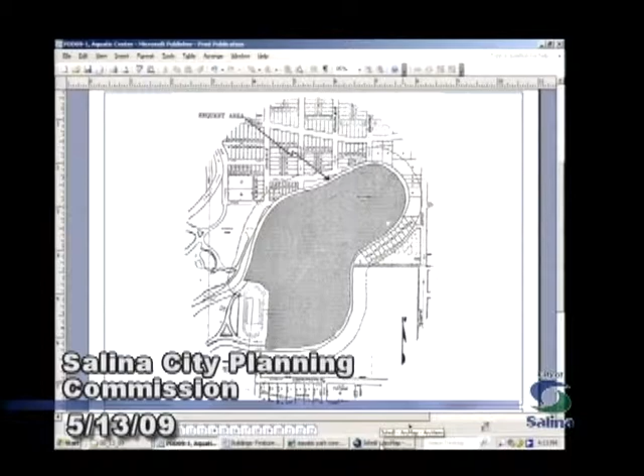This is coming back to you primarily because we first looked at the intensity of the use, the traffic and activity, and determined that this would be a conditional use in the R1 district. But looking at a number of aspects, it was really such a unique facility with unique features that the planned development district, which allows a customized zoning district to be created based on a plan for a piece of property, seemed the most appropriate mechanism.

So Mr. Snyder, Director of Parks and Recreation, filed this application to change the zoning classification of the property from R1 to Planned Development District, and a public hearing was scheduled for this date and time.

As we mentioned, the one thing about a Planned Development District is that you can customize that district according to the plan presented. In the plan presented, there were a number of items we identified, one of which dealt with setbacks of two inner tube storage structures. John, if you want to go to the site plan, you can identify those.

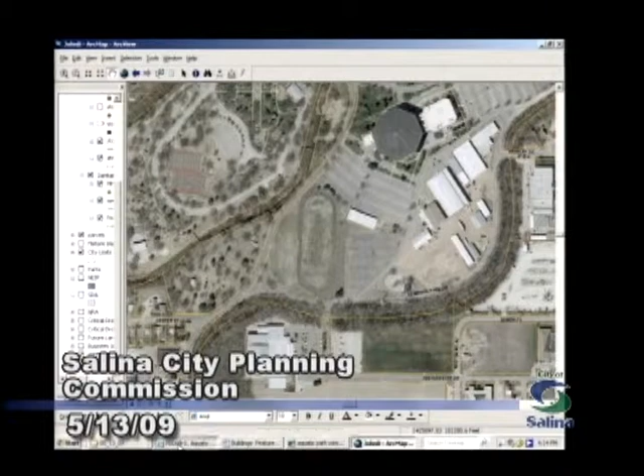Dustin can point those out to you, but we have two inner tube structures along the west side, and then the elevated tubes for the water slides. Those two items are located closer than 25 feet to the west, or Kenwood Park property line.

It's not easy to see clearly from the plans because they're reduced to small scale, but the tower platform for the water slides would be 48 feet tall, and that doesn't fit neatly within the R1 classification.

The other aspect that deals with this is looking at a shared parking arrangement for the Bi-Center, Aquatic Center, and County Fairgrounds that we'll look into a little more deeply.

And then a fourth item: there are existing utilities that serve the Bi-Center, the YMCA, and also an intake line that runs from the Smoky Hill River Channel next to Bill Burke Park and through this parcel to get over to the water plant. All of those items had to be worked around for this particular layout, and we do have some areas where portions of structures would be located over the top of what would be future sanitary sewer and storm sewer easements.

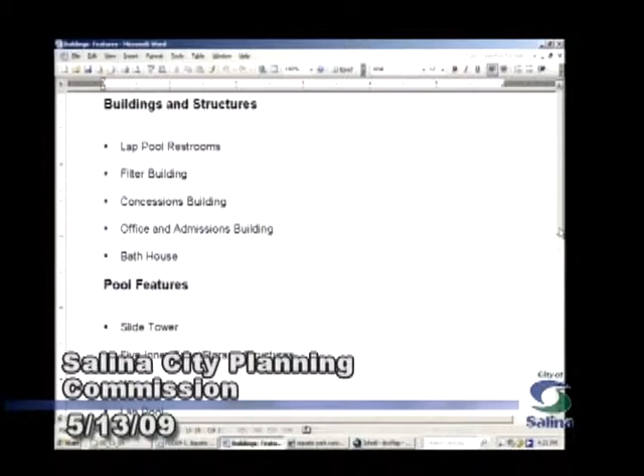We separated this into buildings and structures and then the other features that the pool will provide. I guess, John, it might be best if we just go to a site plan, then I can point it out, because I've got a list that I can read off of.

The lap pool has separate restroom facilities. That way, if a swimming event were taking place during the same time that the pool expected to be open with other people enjoying the park, they could separate, or there'd be a gated system that would separate the lap pool from the rest of the park so that event could take place without disturbance to the other patrons.

There's a filter building in this area that is designed for the functioning of the pool and the filtering system. There's a concession building with a pergola-type shaded structure for the concession area. There's a larger entrance area that will be for offices and lifeguard rooms, and a large bathhouse over on the southeast end of the facility.

The amenities that the park has currently include a large slide tower with 4 main slides that will go to a plunge pool, and another swirl bowl slide that will have its own plunge pool. There's a smaller slide called a family slide that allows multiple people to go down at the same time into a smaller plunge pool.

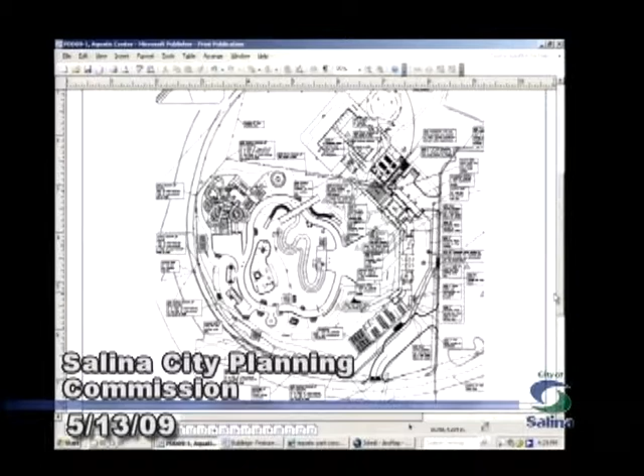As far as signage, I think you have a picture of that, John, and you should have one in your site plan as well. Or do we? Yeah, we've got one in here. You should have one in your packets. I don't see one in our slide package here. Slide 19? Oh, I guess it's slide 19, John.

So this sign would be located towards the southeast corner, and it's approximately 58 square feet in total area, about 9 feet tall, 6.5 feet wide, which is larger than you'd have in a standard residential setting, but this isn't really a residential setting. To the best of our knowledge, no wall signs are being proposed, but under even R1 zoning, they could put up to 2 wall signs on the outside wall of the facility if they wanted to identify something.

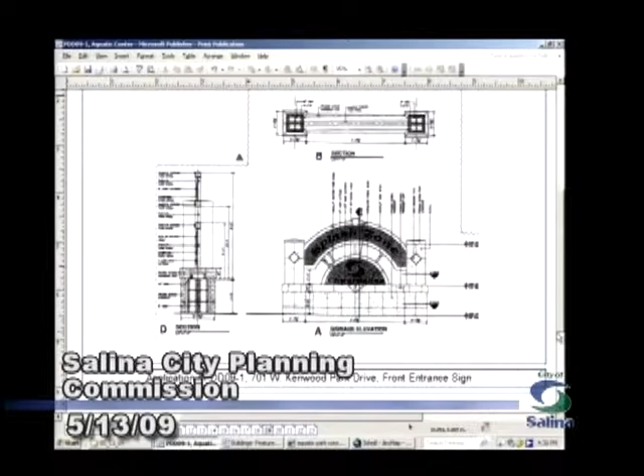As far as landscaping, item 10 there, John, is the overall landscape plan. Our determination is that, applying our width and depth standards to this site, they'd need a little over 16,000 square feet of landscaping and 33 tree units, and they far exceed that minimum requirement.

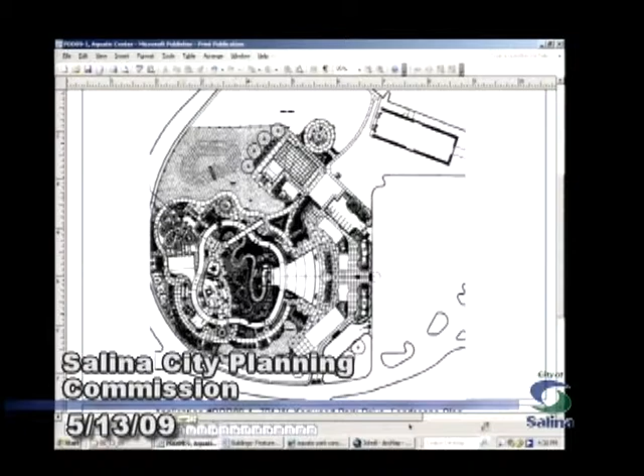They've got shade trees, ornamental trees, evergreen trees, large and small shrubs, ornamental grasses, and wildflowers. So it's a very diverse landscape plan, both on the perimeter and inside the park. The plantings have been reviewed by planning staff and the city forester, and they're all from our recommended tree list and our xeriscaping plant list.

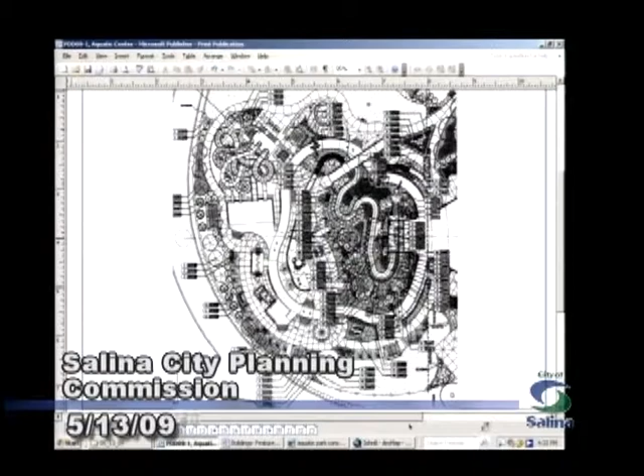As far as parking, just a couple added notes. They have a proposed addendum where they would go in and resurface and restripe the parking area to the east of the site. We also wanted to note that you've got 5 handicapped accessible spaces here, but based on the occupant load and demand for this facility, they're probably going to need additional handicapped accessible spaces close to the main entrance, which will be part of the resurfacing and restriping.

We also wanted to note, John, we have the blow-up there, which is number 20. In this area, they have not provided quite enough width for this driving aisle and backing space, so they're going to need to adjust that to provide a minimum of 24 feet there.

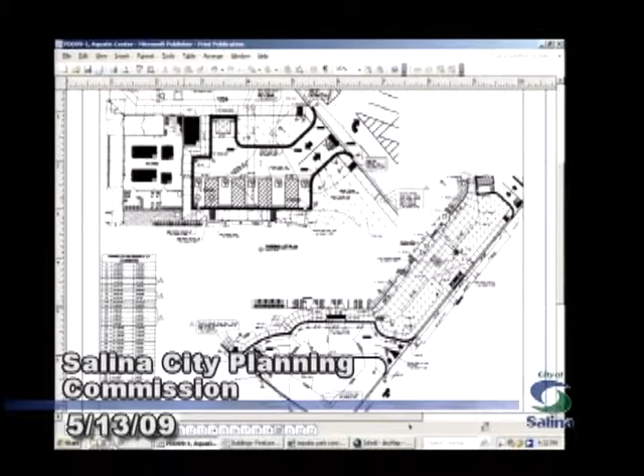If we could go back to the overall site plan, number 7. Just to give you an idea, you have Kenwood Park Drive, a public street, and a public drive over here. There's a planned sidewalk system along the outside. We have a handicapped ramp here and a sidewalk leading people from this parking lot to the gate. This is a vehicle drop-off area here, so you could drop children or others off here to enter the gate, and this is the main area here for entry.

So there's good access and circulation all the way around. You've got a designated drop-off and pickup spot here, handicap parking close at hand, and pedestrian access from the north. So the area as planned is going to be very accessible no matter where you choose to park, or if you don't choose to park at all.

So we think from a zoning standpoint, this clearly has enough land area. It's centrally located within the community, but at the same time there's a number of other public facilities and activity centers here, including the YMCA, and the site's more than 1,000 feet from any residential areas, so noise, traffic, and spillover effects should be minimal. The pool structure and site should blend in with the surrounding area, and you've seen the fencing and landscape plan. Except for the rare occasional multiple event or shared use situation, the existing parking facilities are more than adequate to serve this location.

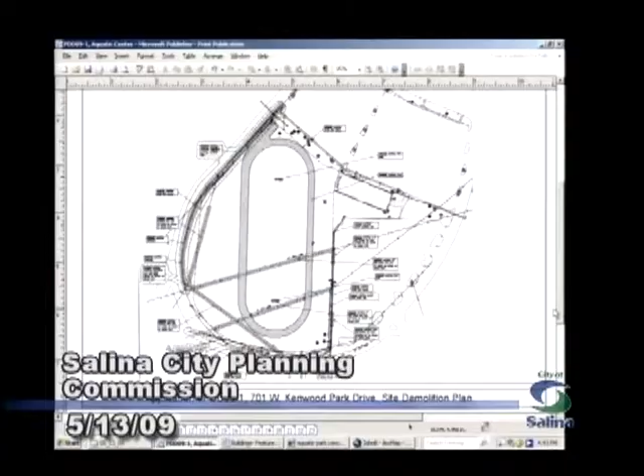Our goal is to have this project completed May 7th, 2010.

The relocation of all the lines—I can expand on what Dean was talking about. The upper line that crosses through the middle of the football field and the track is, I think, a 12-inch well line service. There's a well house across on the county side. All of those are included in the base bid to have them relocated, so we're not worried about any additional cost. That obviously has to be one of the first things of the project, some of the site work, relocating those lines.

Any future plans over here? I notice you've got quite a bit of green space, and I know it's kind of a raised area. Was that purposeful? Was there maybe some future plans down the road, or does the city just want to leave some green space there?

Well, I think there's a couple things. At one point we had considered putting a sign on this elevated area, and right now we've moved it, as Dean mentioned, down into the drop-off area, the sign that you saw. This area does provide the opportunity for expansion.

If you recall, last July there was a survey for the citizens, and there were a number of items people could prioritize that they'd like to see or not want to see. Several things didn't rank very high—a flow rider, for example, almost like a surf place. We thought it might rank higher, but it did not, so it's not included. But let's say that down the road something like that feature, or some new feature that comes on the market that's really popular, the City Commission decides to add—that would obviously provide that opportunity in this open area.

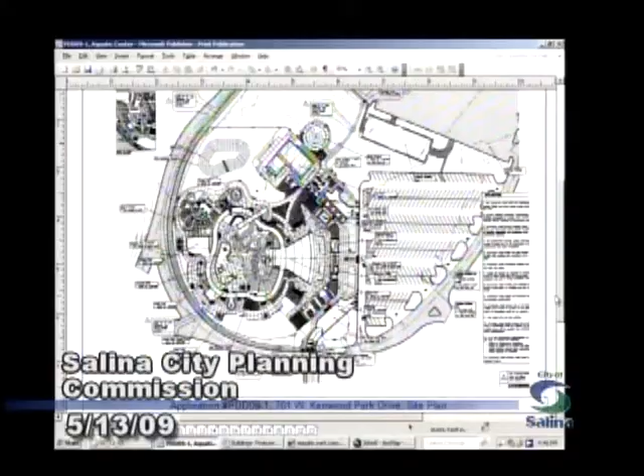The alternates include the spray ground and the mill and overlay of this parking lot. I can tell you that the low bid at this point, including the 2 alternates, was $10,700,000. And I'm pretty sure we're going to recommend that we take alternate number 2 to fix this parking lot and restripe it, as Dean was talking about the need to do that.

We're still considering whether we want to include this in the bid as an alternate, or whether we want to contract that out separately as a standalone project. We're a little concerned on the price compared to what we've built before. The spray ground is pretty much identical in size, function, and appearance to the 3 we have today—at Jerry Ivy, Centennial, and Hawthorne. We built those, some 5 years ago, and the last one, 2 of them in 2002, so they're 7 years old. Those were in the $100,000 range, and the Ivy one was about $87,000. This one is $300,000, so we're a little concerned about that.

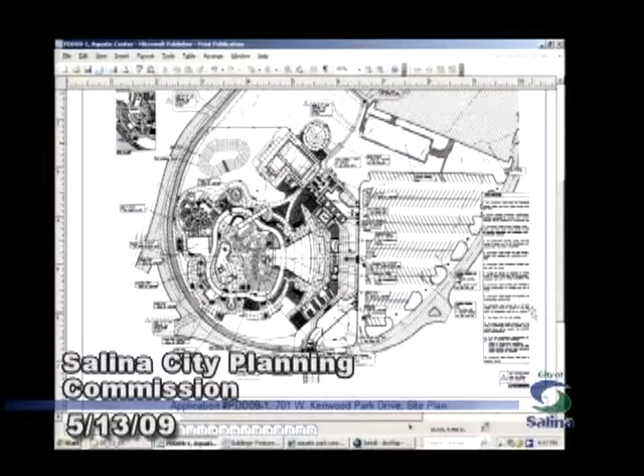So we haven't really made the final recommendation. But even if it is included, it's 10.7 million. As a taxpayer, I appreciate your attention to noticing that, not just being laissez-faire with our other $200,000. But it's still planned to keep it in the final outcome, though, right?

Well, yes, I think what we would do if we did not include it in this particular project, we would look at going out as a separate project and bid, and adding that along as a separate contract.

Dustin touched on it a little bit. The reason this sits over here: right now our existing spray grounds open the 1st of May and stay open until about the 1st of October, depending on weather. This facility is anticipated to operate similar to the time frame we have today, around Memorial Day, maybe a little earlier depending on demand, but generally will shut down in mid to late August when schools start back up. You lose interest from people, and you also lose staff levels when they go back to high school or college. The good thing about the spray grounds is they don't require the staffing levels, so you can open those up because you still have a lot of hot weather in September.

This would be a good issue if we have this, is that it could be separated. This fence comes across here, and it also goes around here, so you could isolate that and have it as a free facility prior to the opening of the other parts of the facility, and you could also have an extended season in the fall. So we see some value in that, having that in the center part of town, as we have the spray grounds in north, west, and south right now.

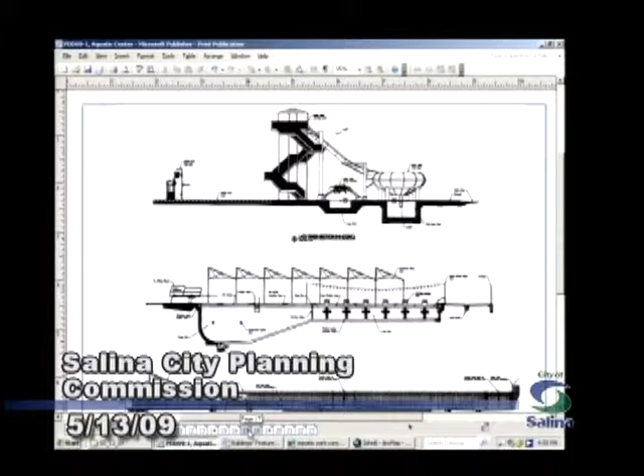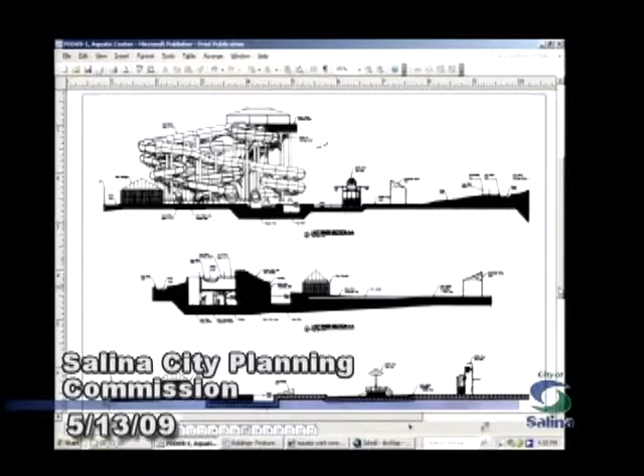We have. We've looked at some of the fee structures for what it takes to staff that. What we've seen so far is that it would probably only be worthwhile for a large group, a company type picnic, a large church type function, not a 10 to 12 person birthday party. We probably couldn't afford it with staffing levels, because unless you isolated just the 25-meter pool, which doesn't provide all the fun features, there are too many other areas intertwined, so you'd need staff levels that might prohibit that for small groups.

About what size staff does this take on an average day? At any one time, how many staff people? We're looking at probably about 40 people, doubling what we have today. That's a great employment opportunity, though not at all times. Right now we run 12, or closer to 20, lifeguards in a day. They're not all on deck at one time because they're rotating through, maybe 6 on deck at a time, with 3 shifts. That'll probably be closer to 40. That doesn't count some of the assistance type workers, cashiers or concession workers, administrative staff that may be involved as well.

What hours? During the late... one of the things we added to the plan, not really in our initial talk, was lights. We talked about adding those as an alternate.

We went ahead, with hopefulness about the economy and the bids, and added lights to the facility—not just security lights, but operational lights so you could swim at night. Generally we operate from noon or 1 o'clock till about 8 o'clock. That's our initial thought, but at least the first year, with anticipated numbers, we'll probably extend that to 9 or possibly 10 o'clock at night, then evaluate based on attendance levels. Mornings will have exercise and lesson programs, but open swims for the public will be noon or 1 till at least 8, with the lights giving the option to go to about 10 o'clock.